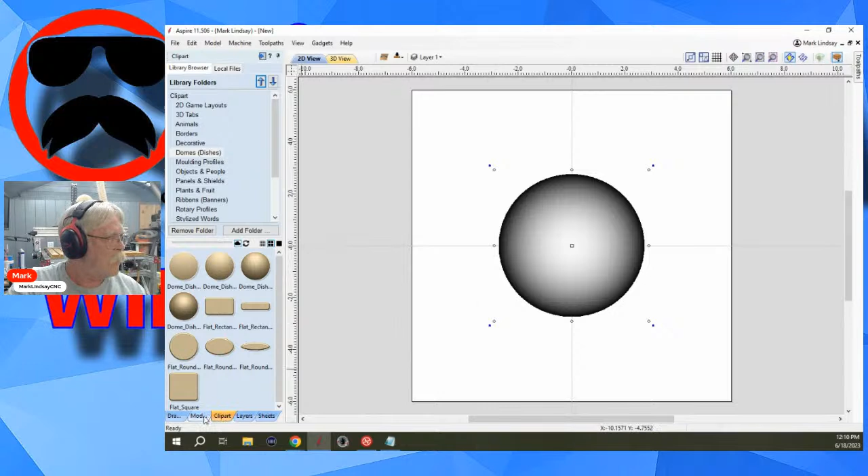So we'll go with that. Now I'm on the top side. I'll go into my clip art and let's go with this 60-degree dish. Now we're on the top, so we're looking at the top dome of the lid. We'll go over to the modeling tab and make this shape height. My material height is 3/4 of an inch, so let's bring this down to 0.7 inches tall to make it a bit shorter of a dome, and close. Now in the 3D view, we have this dome.

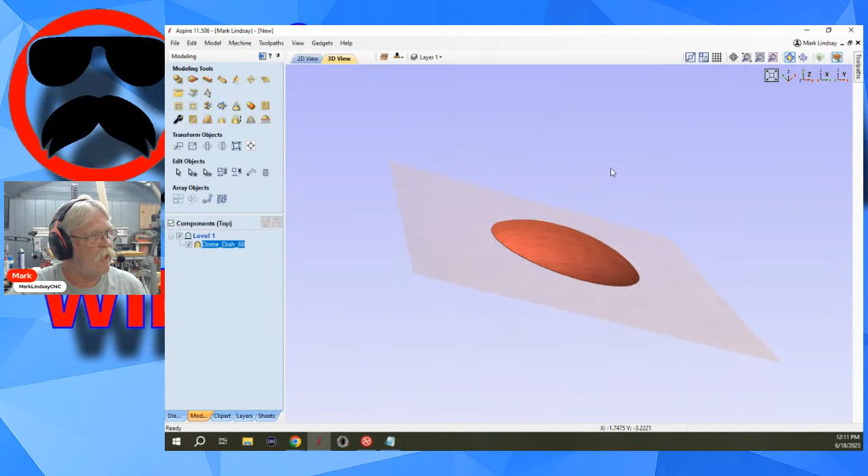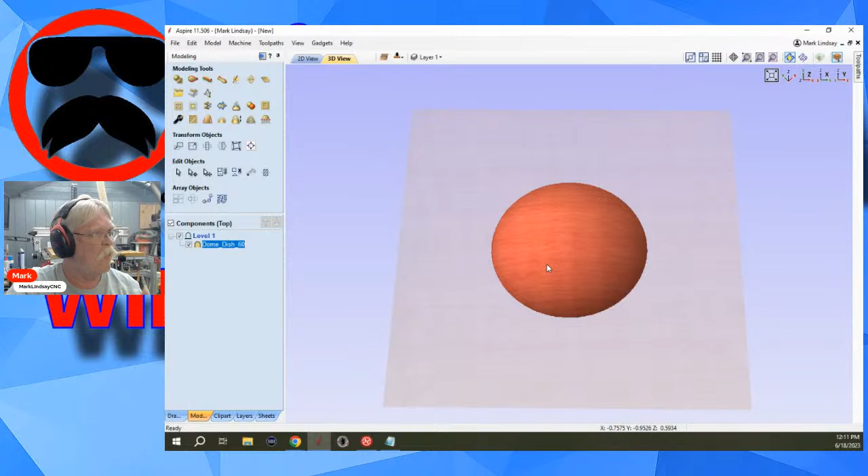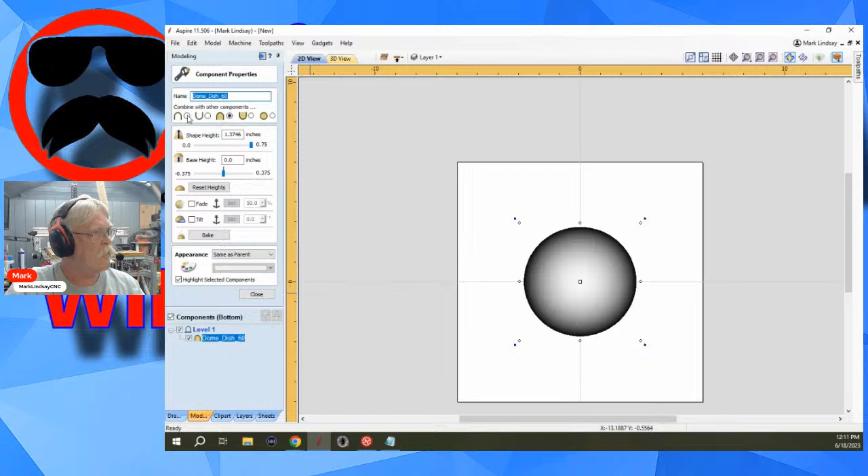Now I want to leave some thickness on the inside of this lid. Let's make it 3/16 of an inch for the sake of argument. So I'm going to flip over to the bottom and get this same dome, go into my modeling tab and into the properties, and make this subtractive - turning it into a dish instead of a dome.

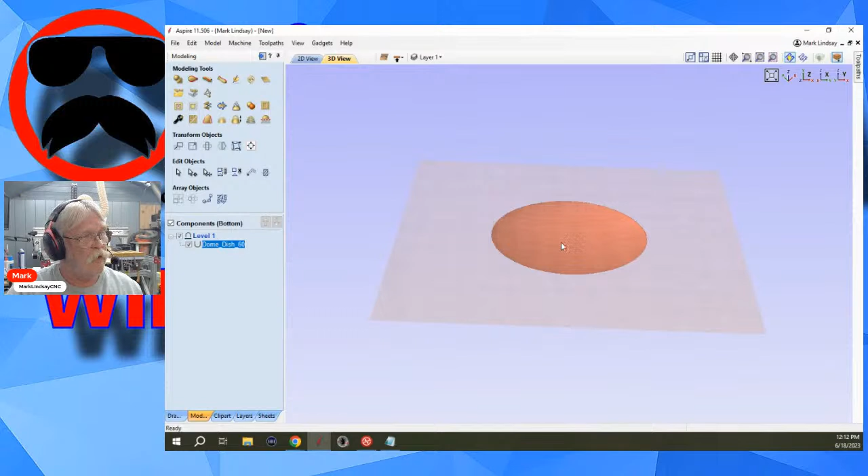Now, my shape height outside was 0.7, but let's go with 1/4 of an inch because that's easier math for me. So I want to go 0.7 minus 0.25, then tap the equals button, and that gives me a dome depth here. Close. And now what I should have is the inside of that lid here, and if I flip over, I've got the outside of that lid here.

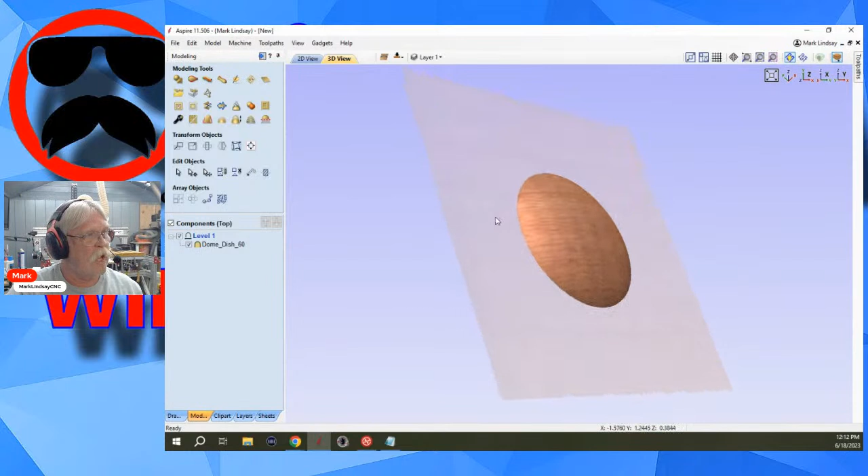So if we look over at the bottom, there is the dish shape. And if we look up here at the top, there is the dome shape. The thickness of the material should be 1/4 of an inch.

Now, something I didn't do was resize it. So the thickness up here is going to be 1/4 of an inch, but down here they're going to be about the same. So I'll need to reduce the diameter of this.

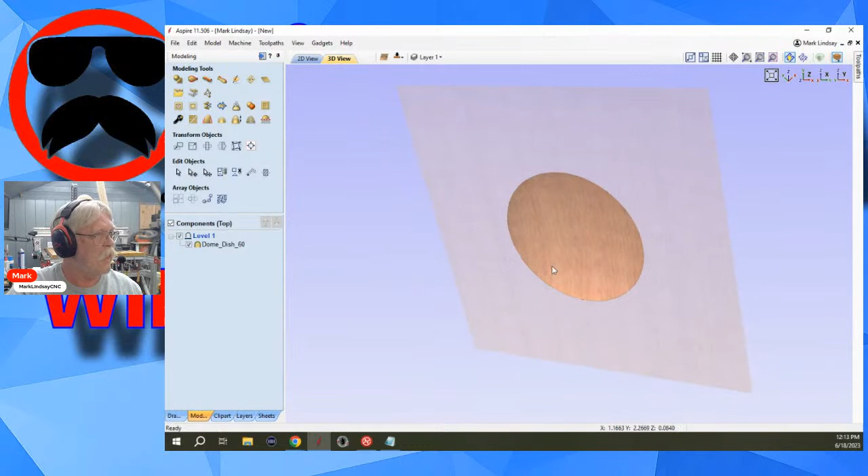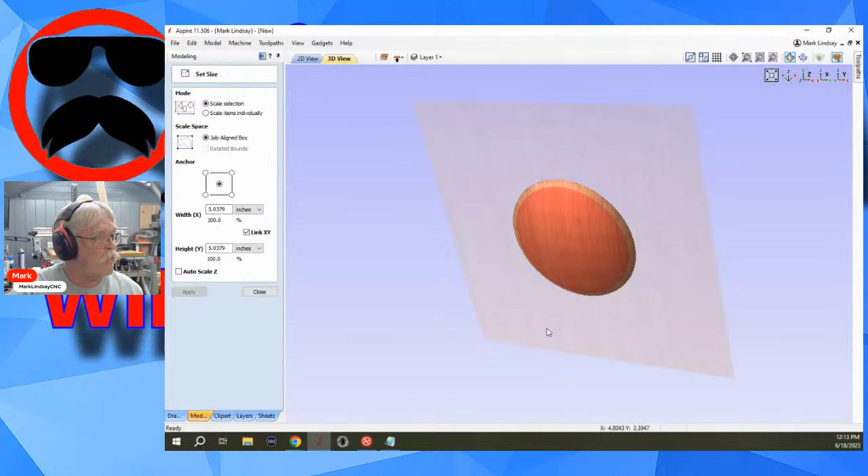So now when I go to the 3D view, there is the thickness of my lid. Okay? There is the thickness of my lid. Now let's see.

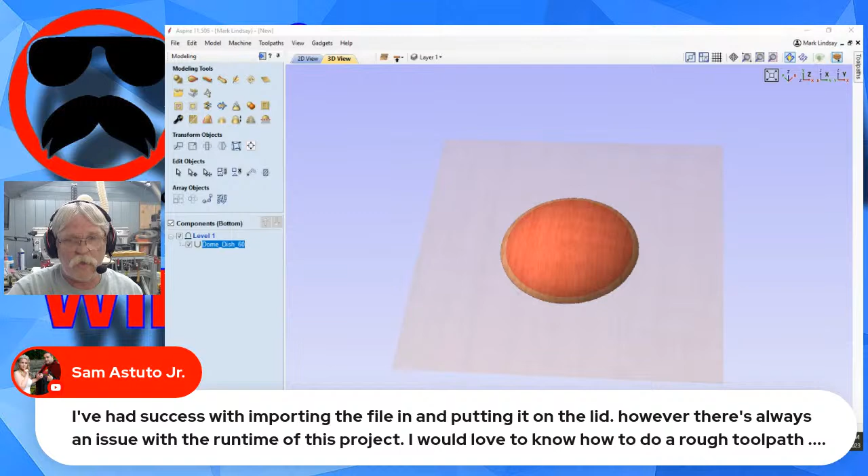I've had success with importing the file in and putting it on the lid. However, there's always an issue with the runtime of this project. Would love to know how to do a roughing toolpath, then a finished toolpath for the remainder portion. The project has taken days to complete because I'm using a tapered ball nose for the finish.

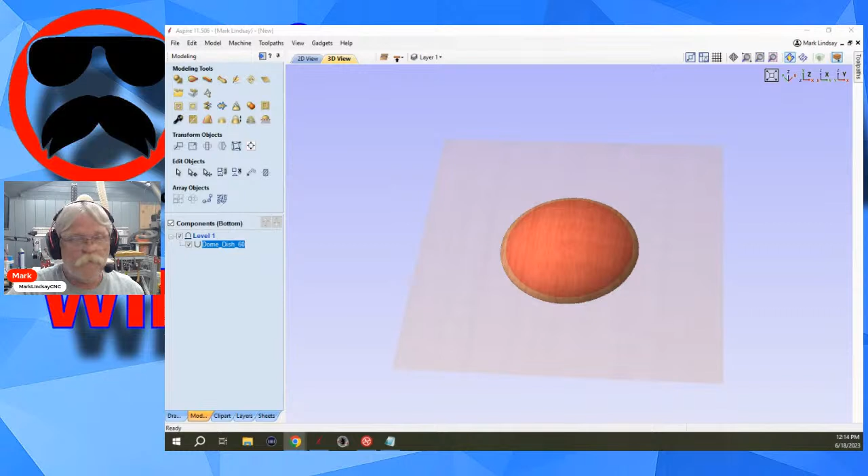Okay, well for that it's fairly simple. You've got the model here, roughing toolpath, and material setup. That's correct, that's correct, that's correct, that's correct. We'll use the model boundary to rough the model.

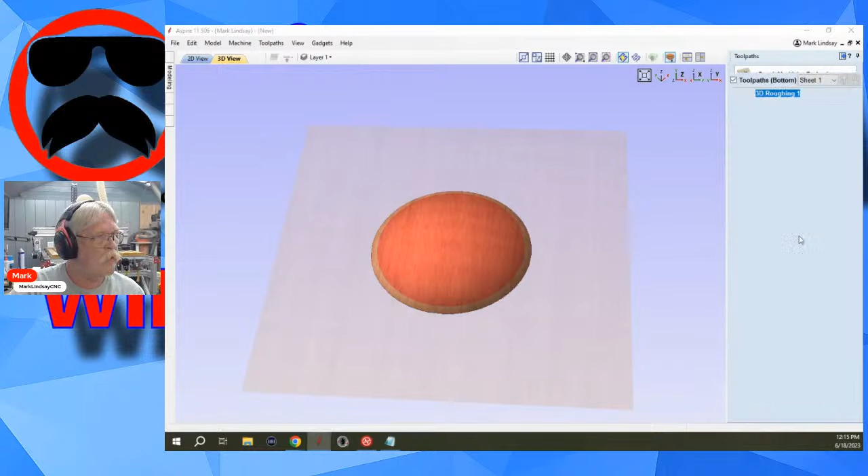And well, let's change the tool. For this, let's use a 1/4 inch end mill and leave a machining allowance of 0.02. We'll calculate that. And there is that tool path.

Then we'll do for something like this with no real detail on top, I can remove that 1/16 inch end mill, and I can do this. Technically I could do it with a 1/4 inch end mill, ball nose rather. I'll use the 1/8 inch.

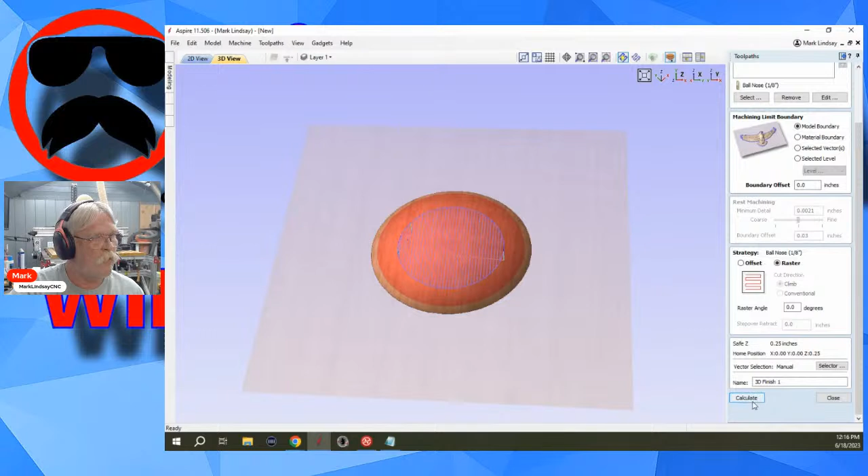Make sure that my step over is less than 10%. Select, and I'll use a raster strategy. Calculate. Oh, I've got it wrong, need model boundary. There we go. Calculate. Okay, so I've got that tool path there.

Let's close this and look at the summary. We're looking at 40 minutes of machine time. Now that is also based on my feeds and speeds here. I do not have a very high feed rate going on with this ball nose.

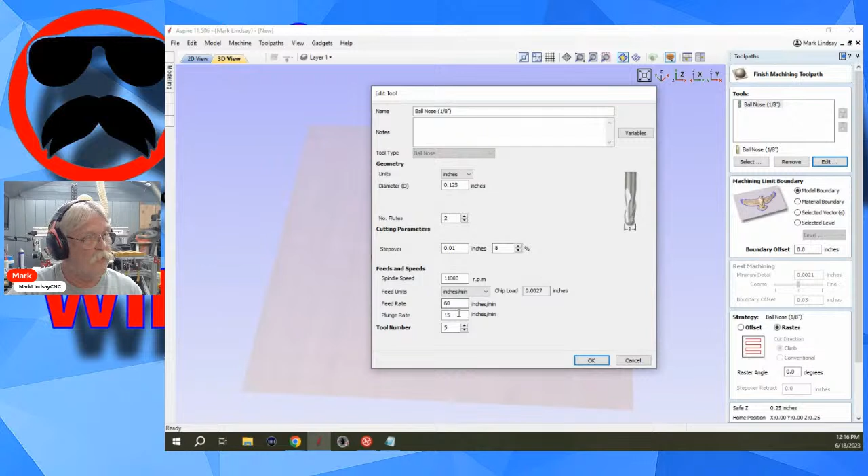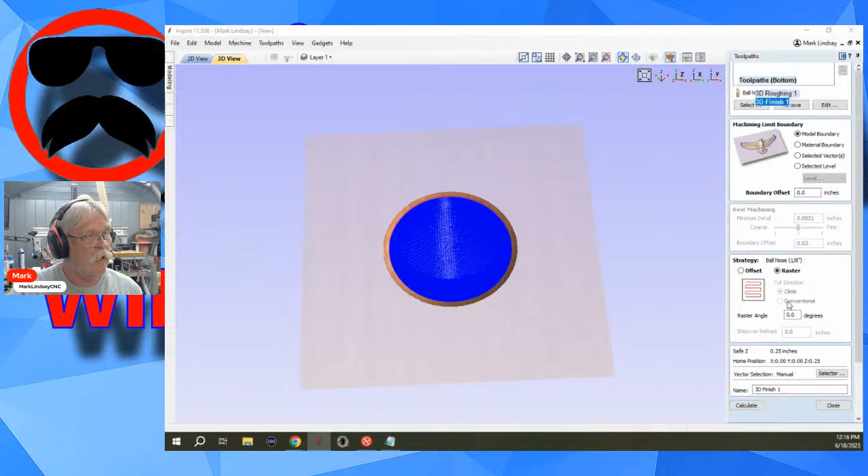In fact, leaving that 0.02 machining allowance, I can speed that up considerably. So I'll go ahead and make it the same as my feed rate. Then recalculate. It didn't really change this time all that much, but it can change that time quite a bit. So...

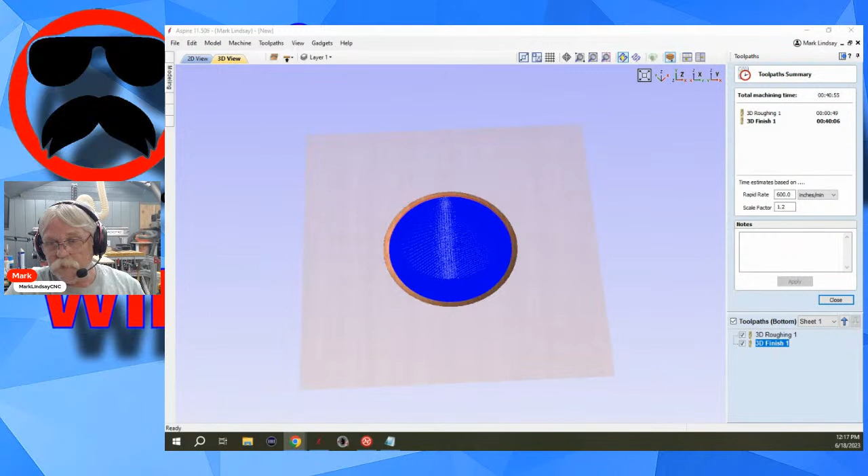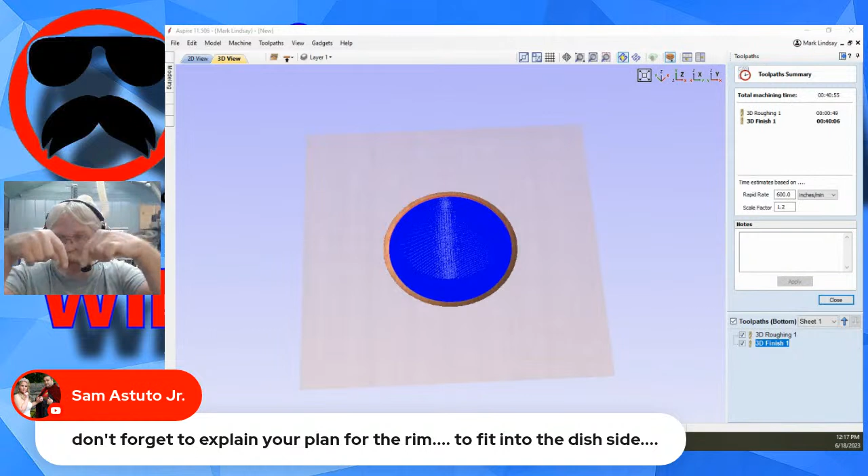Don't forget to explain your plan for the rim to fit it into the dish side. That can be done. That could be done with a pocket. It depends on what the bottom of the dish is. If the bottom half of the dish kind of flares out, you'll have a little rim to sit it on. And it's 100% up to you.

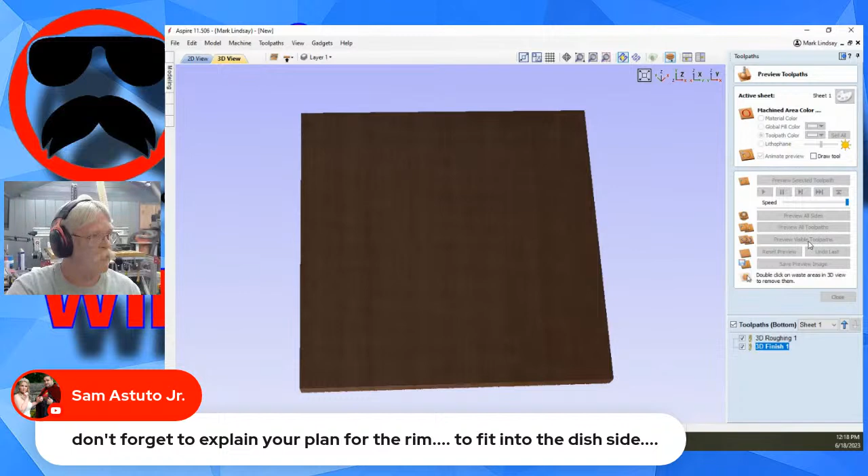Now let's see what this will look like, and we're doing the bottom here. So we'll preview all tool paths. I got nothing. What's going on here? Preview visible tool paths. Why am I getting nothing? Oh, because it's on the bottom and I'm looking at the top.

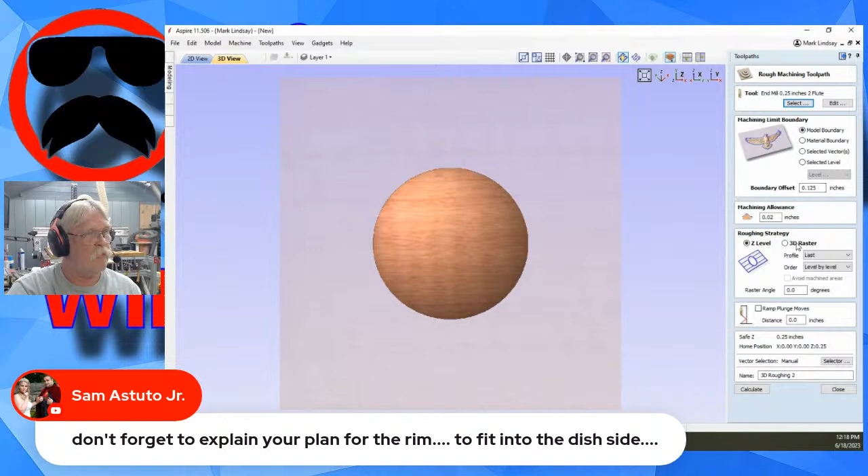So there is that tool path there. I have created no tool paths for the top. So let's go over to the top, close, and we'll do the same things. I'll use the same thing, model boundary, yada yada yada, calculate.

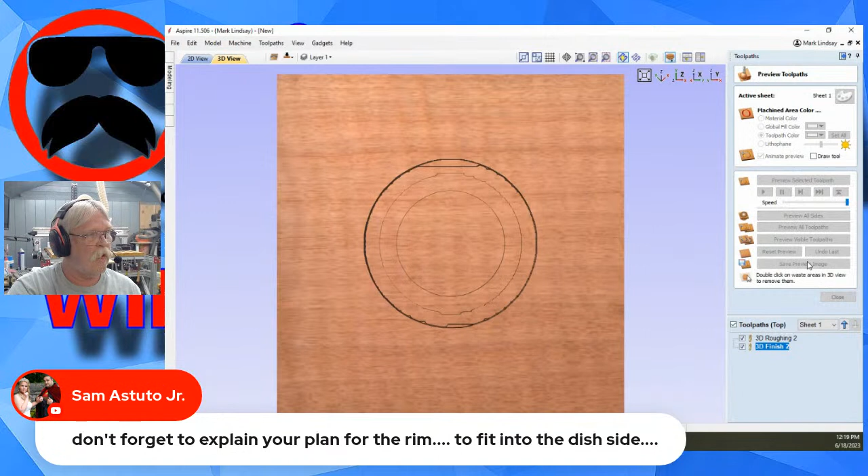Close, then we'll go to 3D finishing, model boundary, use the same things, calculate, and then let's preview all sides so we can see what that looks like. Okay, now I did not do a profile pass, so it did not cut all the way through, but there basically is the lid, the inside and outside.

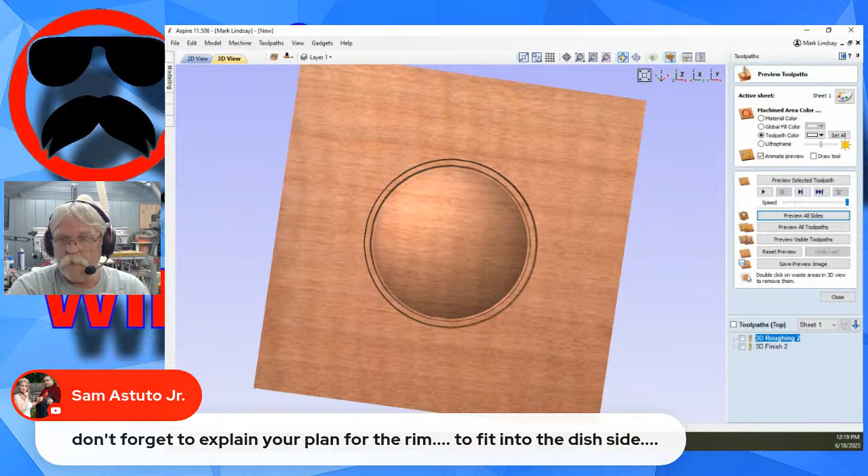Now, as for your other questions, is it possible to run a tool path for the shape of the bowl, then run another tool path just for the design on top so it doesn't take as long? Not really. I'm assuming you mean a 3D design on top.

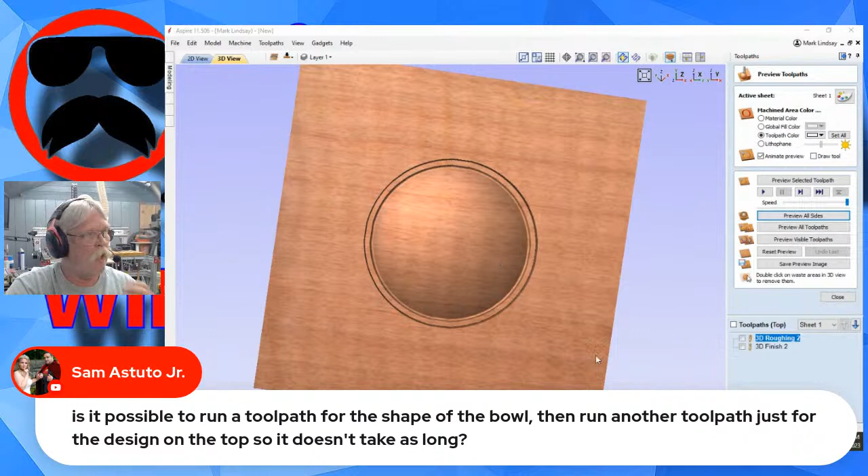A 3D component up here. Once you create that, it becomes a part of the model.

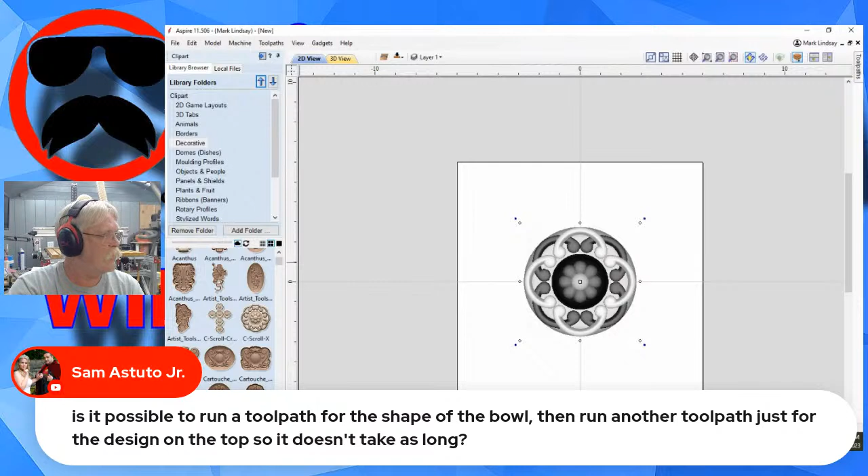Let me zip back over here, go into my 2D view. Am I looking at the top? I'm looking at the top. Now let's go into the clip art and decorative. Let's look for something to throw on top. Let's put that on top just for the sake of argument. And I'll hold down Shift, reduce that so that it's right in the center there, okay?

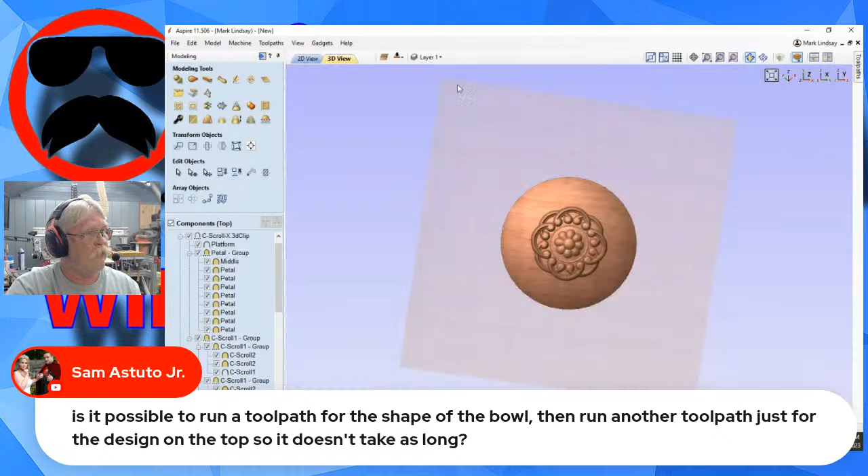So if you're still following me, Sam, I've got these two models. If I come over and look at it in the 3D view, that's what I've got going there. Now, if we look over here in the component tree, I have two components. But once those two components are put into the component tree, this now makes one model according to the software. The software sees this as one model.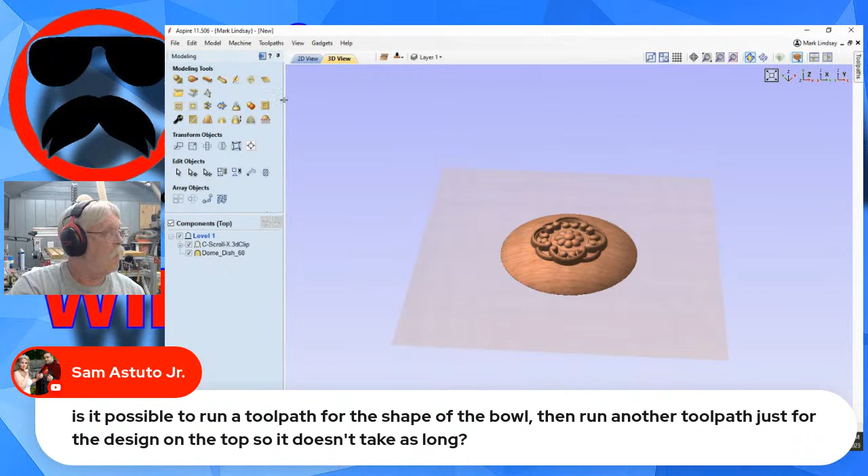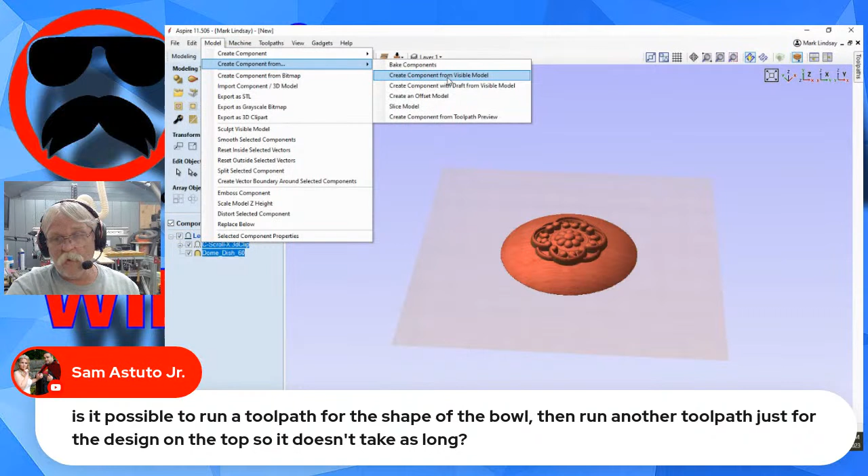And you can bake this together to create one piece. Well, it's not actually baking, but we've got that. Click that, and I'll hold Shift and click this. Come up here to model, create component from visible model. So I click on this, and it is made. I can turn these two off. And that is a copy of this. So it's one piece.

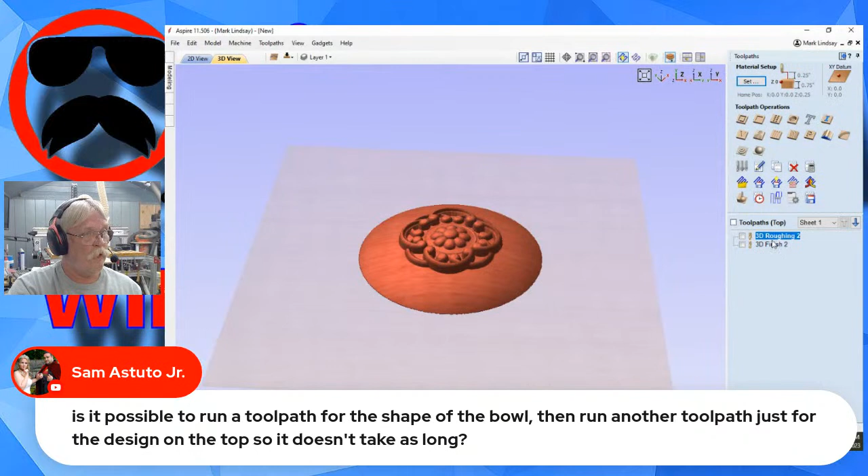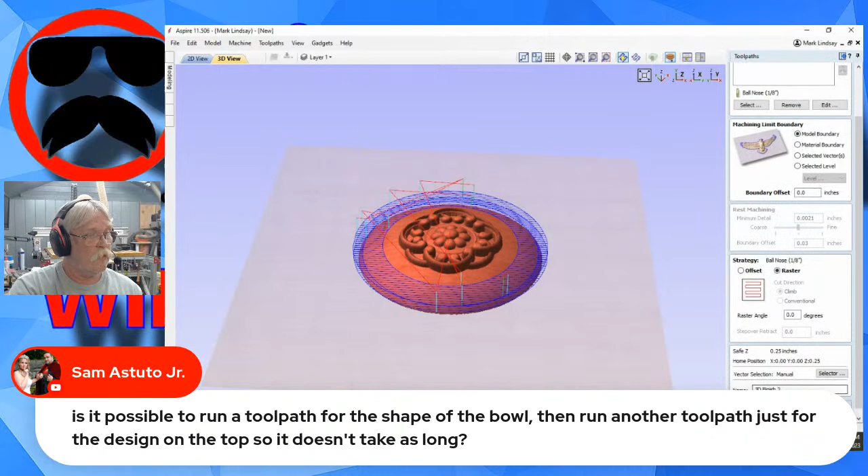So now if I go over here and I'm looking at the top, yes, 3D roughing, because I've added this, it's going to change everything in here, recalculate, reset my preview, and go over here and recalculate.

Now, when I preview all toolpaths, yeah, I needed to bring that down. That model height was too high. It stuck up over the top. But we'll look at the time. Now we've added another 13 minutes.

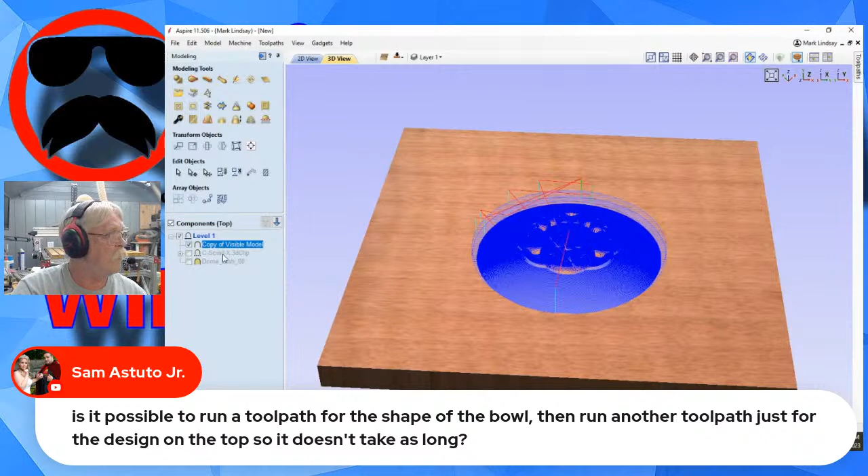Martin brings up an excellent point, and let me fix this because I don't want to leave it looking like that. Reset preview. Go over here. And, well, no, I don't have to do that. I can come over here into material setup, and my model thickness exceeds material thickness. I'll set this height. No, I don't want to scale both sides. I want to set this height to 0.75. Apply. Close.

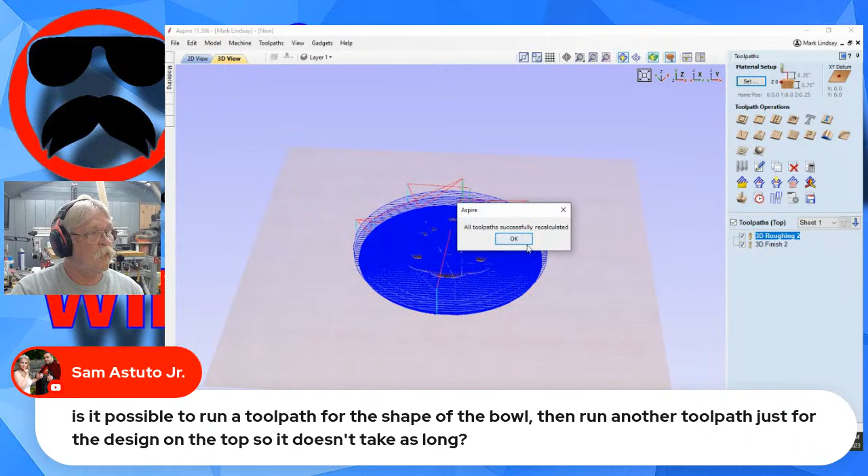Recalculate. Okay, now let's go back here. We're looking at the top. Now let's preview the toolpaths. There we go. That's much nicer.

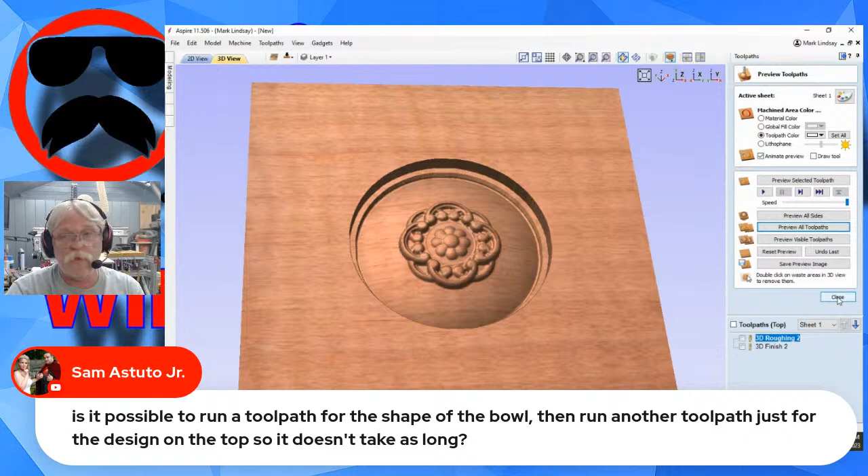So it does add time. But it also is dependent on the size of the bit that you're using. I'm using the 1/8 inch tapered ball nose.

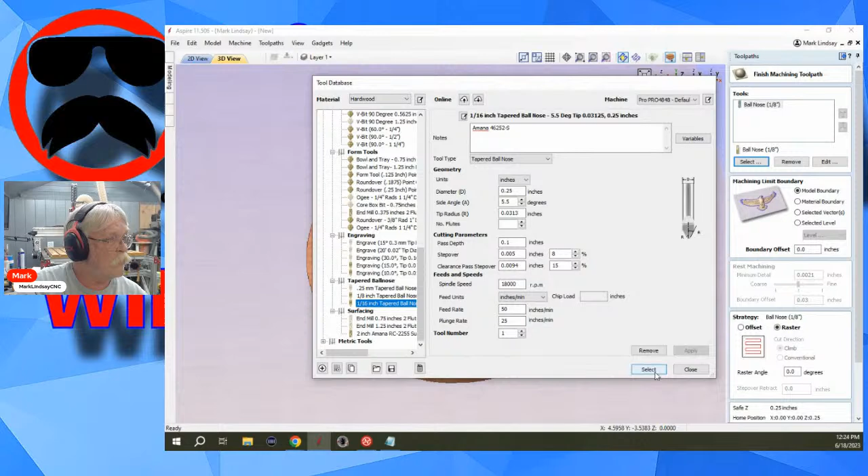Now, Martin Pearson brings up an excellent point here. You could use rest machining for this project. And what that is, we'll go into the finishing toolpath, and I'll add another bit. For this, I'll use my 1/16 inch tapered ball nose. And so now I'm using both bits.

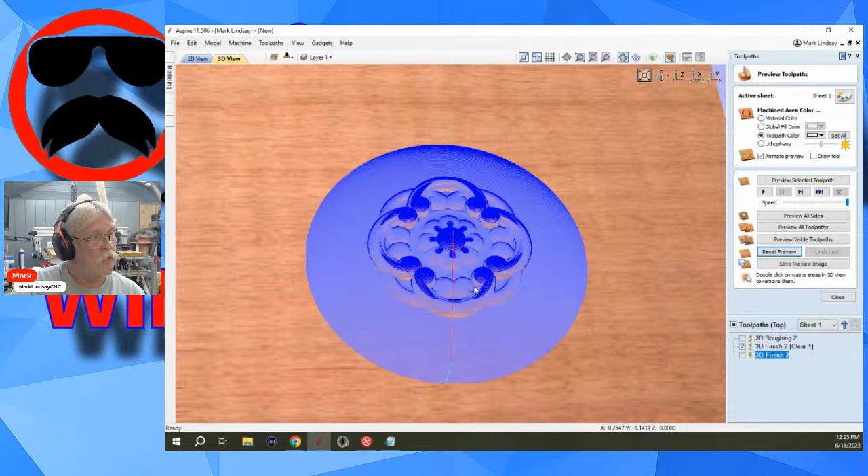Calculate. And what that's going to do is, let's reset the preview. That's going to use that 1/8 inch ball nose to come do this entire model, then when that's done, that 1/16 of an inch bit's going to come around and just do these little areas that the 1/8 inch could not reach.

So now when I uncheck and we preview all toolpaths, there's the roughing, there's the first finishing, and there's the final finishing. Much better detail. And again, I'm using the lowest resolution just to speed up this preview.

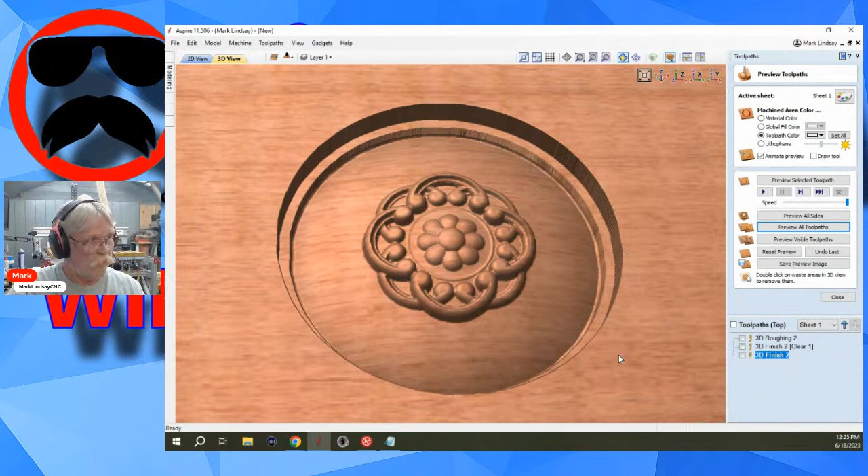Close that, and let's go select all toolpaths. We're looking at, we're looking at top and bottom though, I think. Yes, this one here, 3D Finish 2. We've added quite a bit of time. So let's select just these 3. We're looking at 2 hours. So we've added quite a bit of time.

That's because we've reduced the size of that end mill. Now, let's take a look at that, and you'll see why. We get into this tapered ball nose here. The tip of it is only a 1/16 of an inch in diameter. And we're looking at our step over of 8%. That is 5/1000ths of an inch it's stepping over every time it makes a pass. That is not very much.

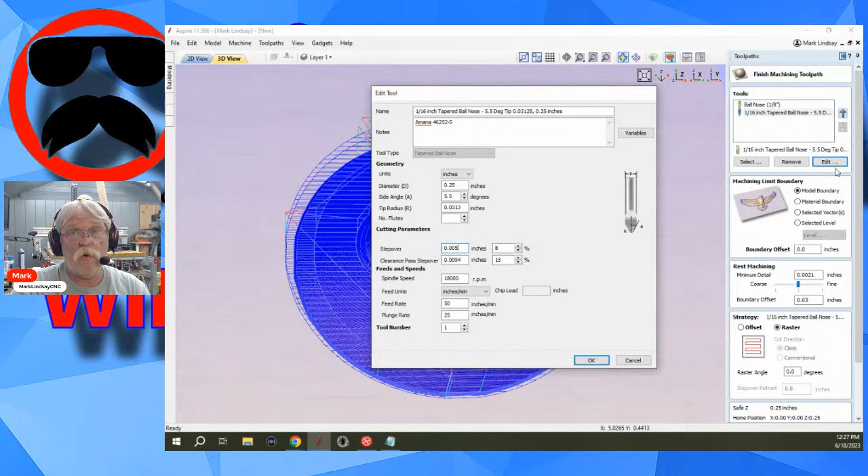For my metric compadres, that is about 1/8 of a millimeter, 0.127 of a millimeter. So that'll show you how small that is, that it's stepping over. So if it's a fairly small dish, that won't really add up all that much. But if you're looking at something that's 10 inches in diameter, that is huge. That's going to take a lot of time. Figure 10 inches at 5/1000ths of an inch per step. That's what takes so long.

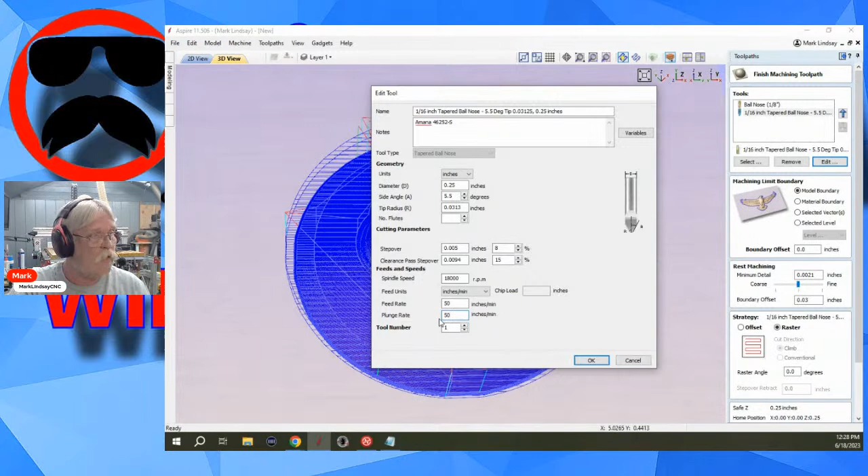Feed rate and plunge rate, if you're doing a finishing pass, generally speaking, we can go ahead and increase the plunge rate to the same as the feed rate because it's not removing much material at all. So then we calculate that and we'll see what that did to it. Close that. The preview is going to look the same.

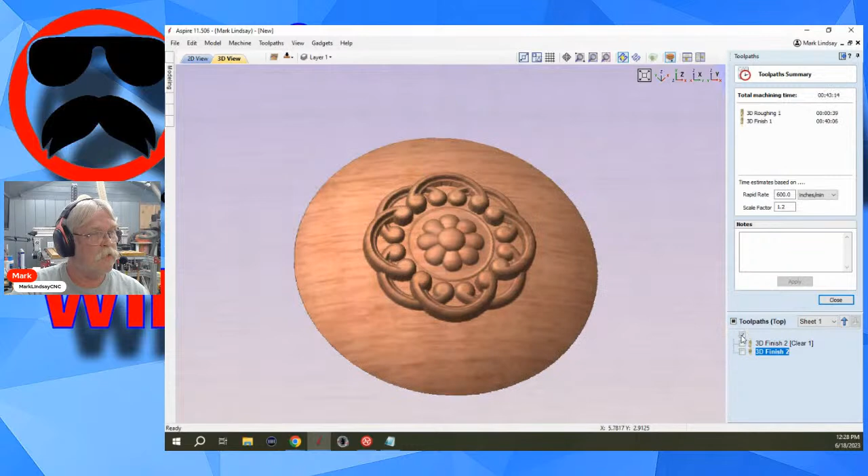And let's just do these 3 only. We're still looking at 2 hours and 11 minutes.

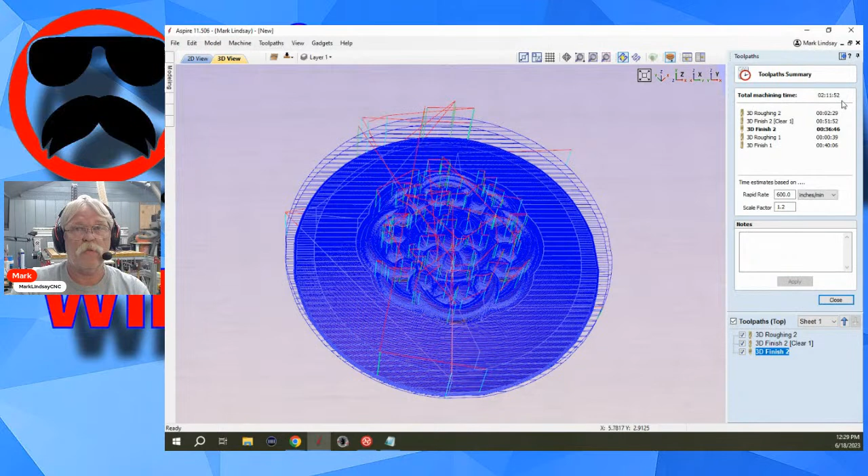Now, 3D carving, it just takes time. And there's no way of getting around that fact. It takes time. That's why it is so difficult to price and to sell 3D projects.

If you're making this for you or as a gift, then the time is less of a concern. If you're making these to sell, you've got 2 hours and 11 minutes into the lid of this dish. We haven't even talked about the underside of the lid, and we haven't talked about the dish itself. So you may end up with 10 hours into a project.

Well, let's figure, personally, I think machine time is criminally undervalued these days because so many people have CNC routers. There's a lot of competition out there where there didn't used to be.

But if you figure $40 an hour for machine time, which is low, that's still 10 hours. That's a $400 dish. And that's just for the machine time.

We haven't gotten into materials. We haven't gotten into the prep. We haven't gotten into sanding and finishing. We haven't gotten into any of that stuff. So you may be looking at a $500 or $600 dish here.

That's why it's so hard to make money on 3D carvings, because it may be worth every penny of that $600, but you have just reduced the number of people who are not only able to, but are willing to pay that kind of price.

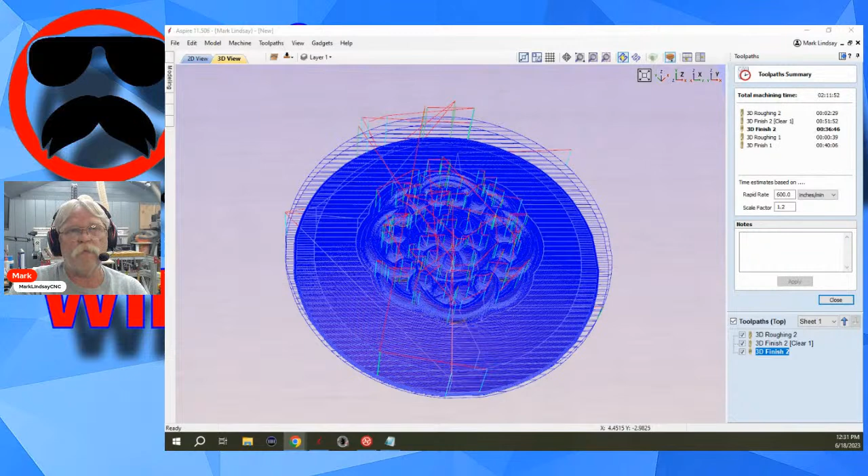So you're using a 6mm tapered ball nose. Is that the shank diameter or is that the cutting diameter? You know, the tip diameter.

I hope that kind of helps you out, Sam. There's a lot of give and take when it comes to doing 3D carvings.

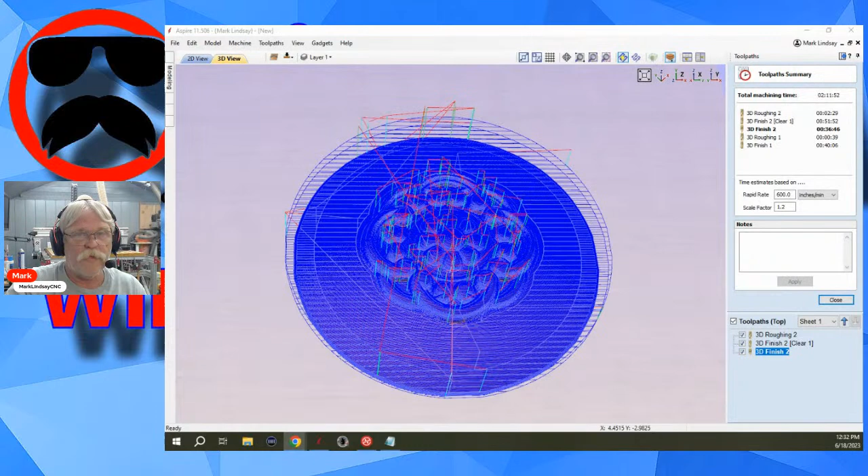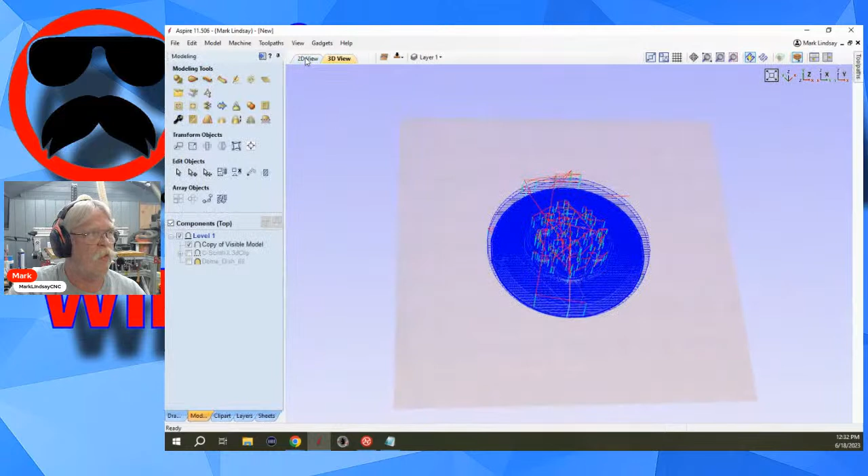And one of the things, as you alluded to over here, is the finishing time. 3D carving just takes time. The longest I have ever heard of was a gentleman who was over in Europe, and I really don't remember his name. But he was talking about one file they did at his company that was like 26 million lines of G code, and the carve took 54 hours.

Now, this is on an industrial CNC machine, a 54-hour carve, and they ran it 10 hours a day for 6 days to get that one carve done. And believe me, the client paid, and paid heavily for that project. And this has been, you know, 5 or 6 years back.

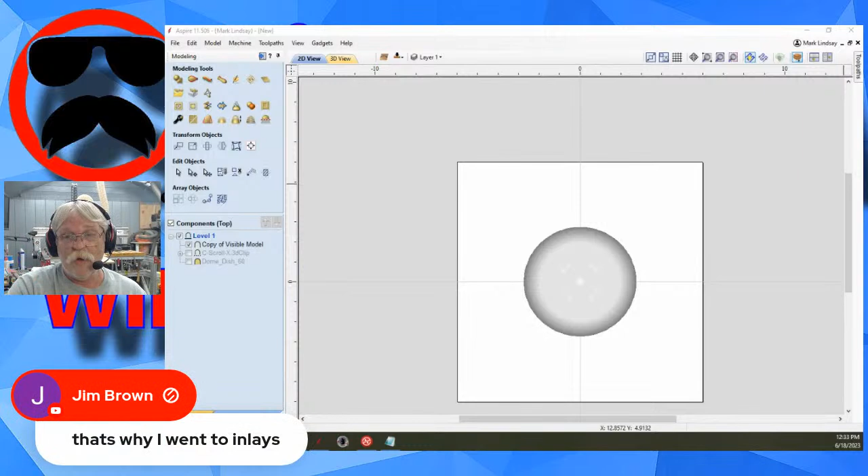So, you know, yeah, it's hard to make money on 3Ds. Jim Brown says that's why he went to inlays. Yeah.

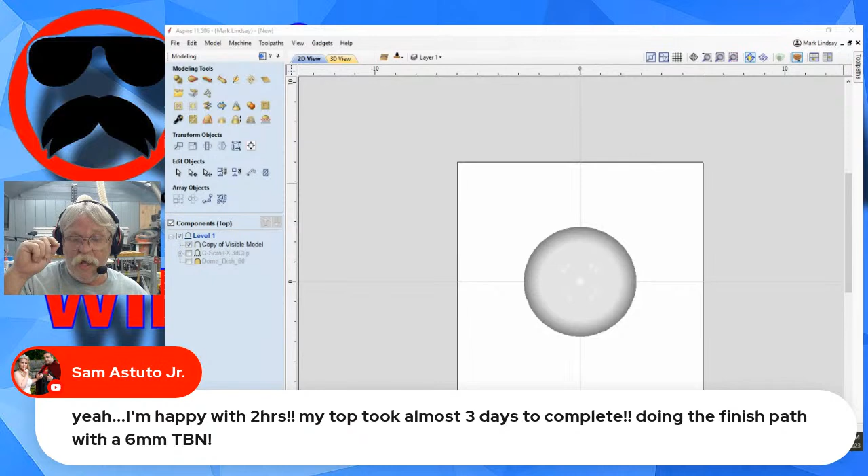Sam, get into your feeds and speeds. If you're doing a roughing tool path first, that's going to leave a lot less material for that tapered ball nose to go through. And you can remember one rule of thumb: your CNC router always moves at the rate of the slowest axis.

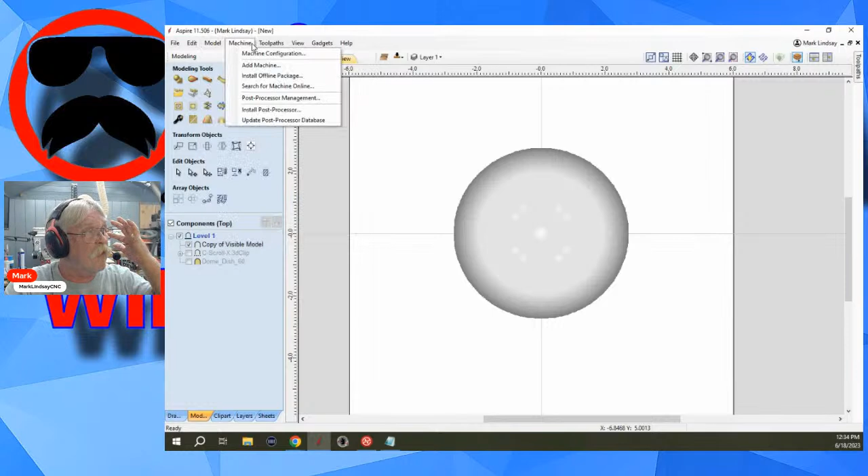And that's one reason why 3D machining takes so long, because your Z is in almost constant motion on a 3D carve. And there it is right there. Let's go into my

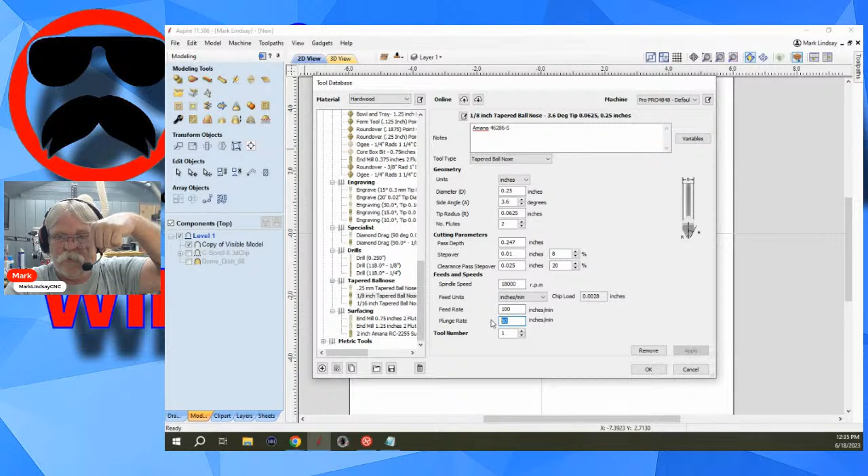eighth inch tapered ball nose. The feed rate of my tapered ball nose is 100 inches per minute. But my plunge rate, that's how fast the Z is going to go up and down, is 50 inches per minute. So on a 3D carve using this tapered ball nose, this feed rate is irrelevant because it's going to move at the rate of the slowest axis.

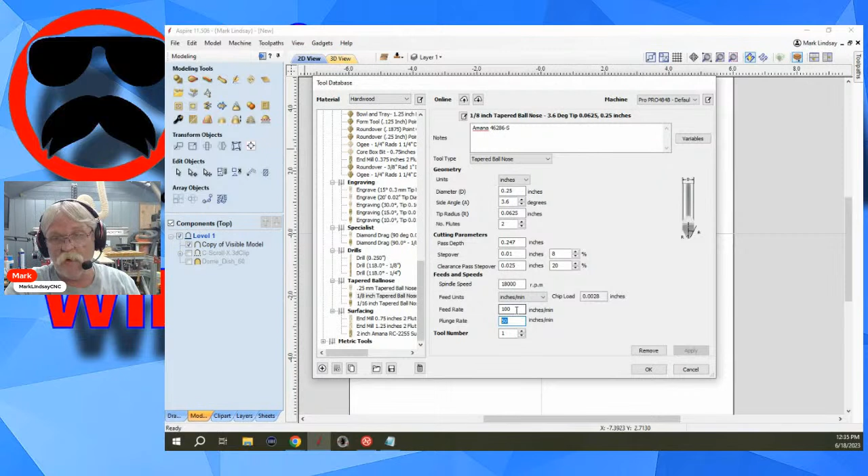In this case, it's my Z. So while it's doing that 3D carve, it's going to move at 50, not 100. I could set this to 1,000. It's going to run at 50 inches per minute.

So if you do a roughing toolpath and leave a small amount of machining allowance, I can in this case, for this project, bump that up equal to the feed rate. So that would work. Okay.

Now you're talking about a 6 millimeter ball nose. That's roughly slightly smaller than a 1/4 inch ball nose. And for that, I wouldn't even use a tapered ball nose. I would just use a 1/4 inch regular ball nose bit.

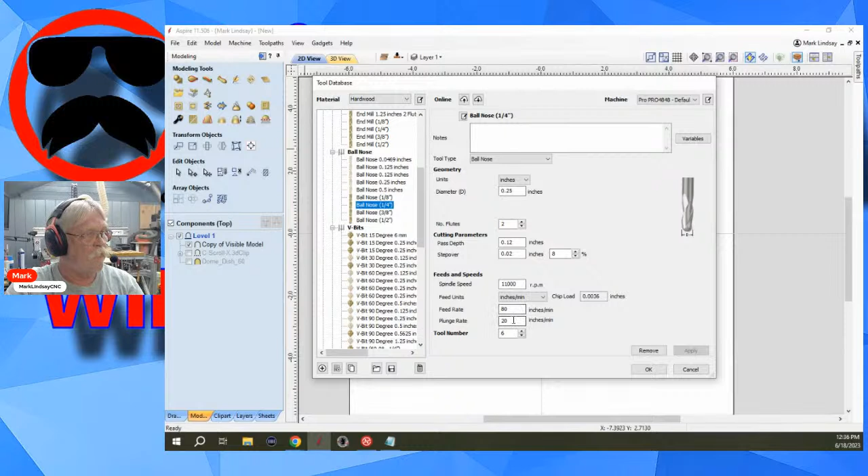Even that is way too slow. That 1/4 inch ball nose can go a lot faster than that. I'll just use 100 as an example. I typically set my plunge rate to half of my feed rate. Click apply. On this 3D carve, I would set my plunge rate to be equal to my feed rate.

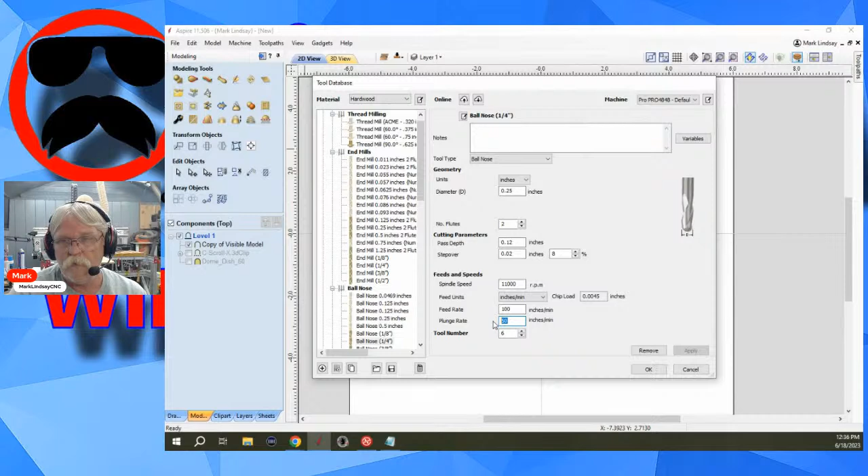Now A10 Tall, channel member, says, I do 3D carves all the time. For me, it's the slow acceleration that's responsible for the slowdown, not so much plunge rate. That's in your CNC router settings, that's in your controller settings.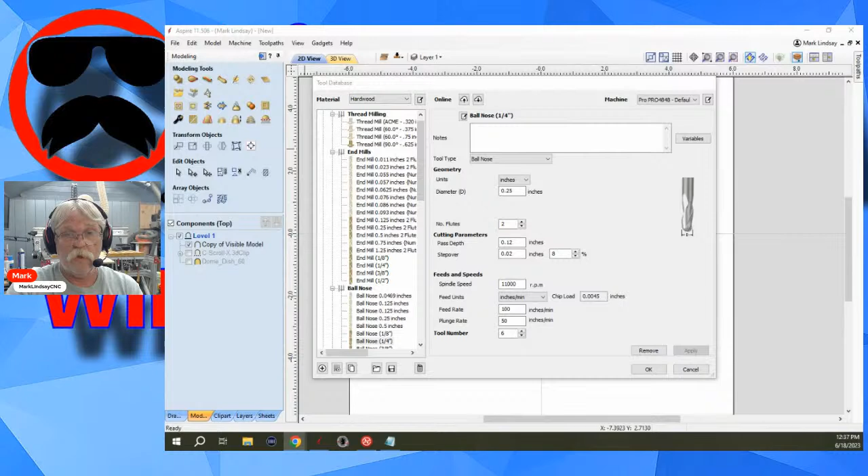When I got my Avid, it was set by the factory to accelerate at the rate of 50 inches per second. That's taking off quick, and it was too quick for what I do because I tend to do small things. That rapid of acceleration was just too fast. I slowed it down to 25, and I'm getting ready to slow it down to 20 because even then, that's a little bit too quick.

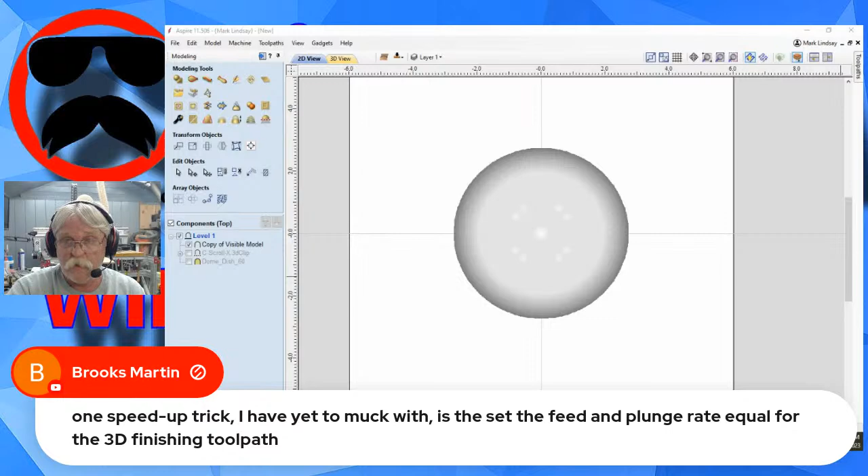Brooks Martin says one speed-up trick I have yet to muck with is set the feed and plunge rate equal for the 3D finishing toolpath. That's generally speaking what I do, Brooks, on the finishing toolpath. If I've done a roughing toolpath, fine, but if I haven't done a roughing toolpath, then I won't bother. I don't mess with it.

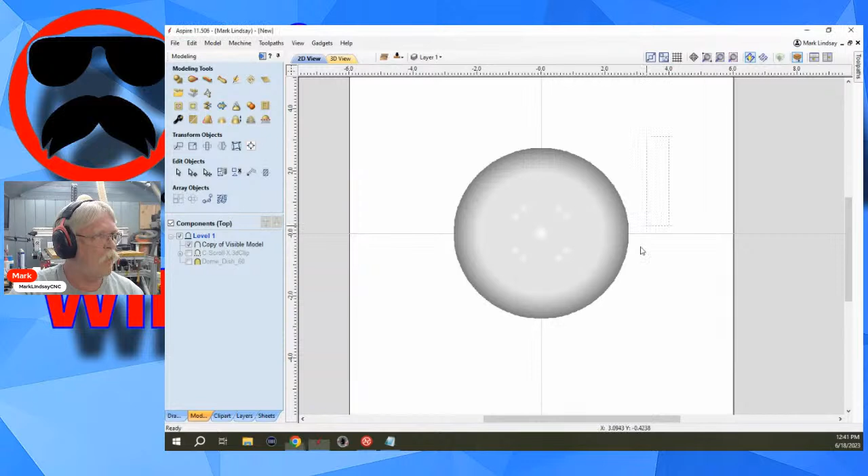But in a nutshell, let me go ahead, I just wrote myself a note, that's what I was doing. Let me go ahead and do a real quick and dirty screen share here. We'll have to go ahead and get rid of all this stuff. Let's go ahead and delete all that, and we'll go back over to the drawing tab, change back to a single-sided job. This is an irreversible operation. Yes, okay, we're done.

Basically, in a nutshell, importing a photo or drawing. Now, some photos are just not going to translate well, they're just not going to do very well at all. Not every photo can be bitmap traced. Some can, some can't.

Basically, look for line drawings, look for coloring book pages, clip art, things of that nature. You'll come right over here to this icon, Trace Bitmap. But first you'll have to import a bitmap, and that's this icon up here under File Operations, the last icon on the top row. Import a bitmap, and it will take you to wherever. I don't have any bitmaps here to import, so I won't.

You'll import the bitmap. I don't resize until after I have done the bitmap trace. You'll import it into the software, then get into tracing the bitmap.